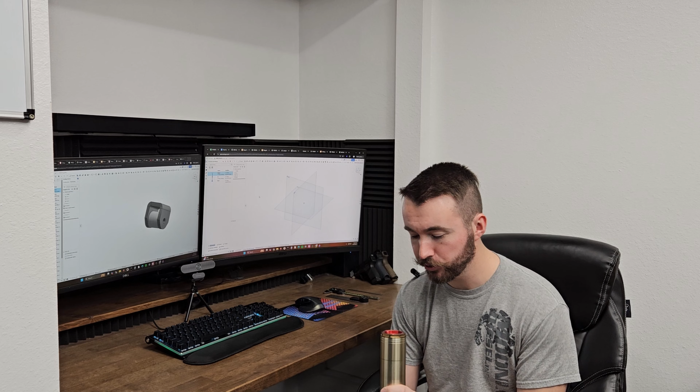On the agenda for today, we have the fork seal driver, and I'm really confident in that one. It doesn't take a lot of force to drive in those fork seals. We'll be building one that can do the dust seal right here and also the fork seal up inside of there. It's going to be a two-piece wraparound design, and then I'm going to come up with a fancy way to hook them together so that they don't fall off.

If you've seen the Motion Pro Ringer, they have like two separate rings that interlock, and as you can see here, I already redesigned that one and printed my own. That's how it works. You have these rings that wrap around the outside, and then once you stick these together, you just rotate that and it can't come off. So I designed this just for fun to see how it would work. This is kind of my test before making a YouTube video about how to do it so that I for sure know what I'm doing.

But I decided that the ringer type design isn't good enough for me because it was someone else's idea. And it is very cool, it works super well. But yeah, they have it patented. So I'm gonna let that thing be theirs. It's cool if you wanna make one for yourself, but I'm gonna leave it at that.

So I design injection molded parts all day for a living, so what I'm going to do is an oversized snap feature type stuff like you might see on an injection molded part. Basically, it'll have a catch on the one side and snap together on the other side. That should work really well, and since it's all 3D printed, that lets us do a little bit more complicated of a part there because it doesn't have to be machined.

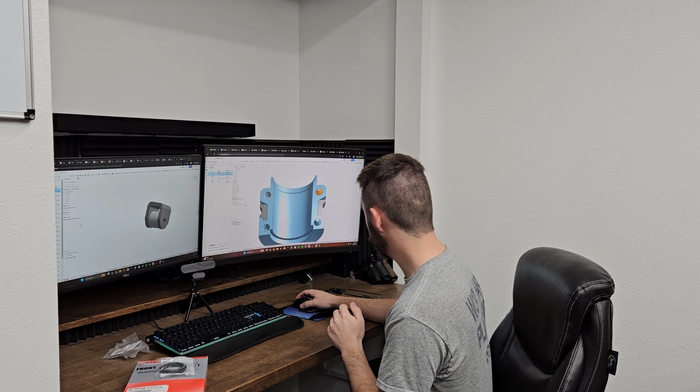And normally I would just go back and edit the part studio that I already created for that, which is right here. It's one common part across both sides. That's why these little posts here are offset. They're protruding on this side and cut out on the other side. That is just so that it's a common part. And then same with these, they're common parts too. I don't really think it makes sense to do that the same way on this snap feature design, because I could just do one big solid one that clips onto the other one. But at the same time, I'll have half of the parts. So give and take, I still have the same amount of unique parts to print, but I just have to print one of each of them instead of two.

So for the sake of how I want to outline this video and actually show you how to do this, I'm going to start a new part studio right here, and I'll bring up the screen so that you can follow along, and I'll try to explain what I'm doing, at least for the first part of this, and then when it gets into the snap feature, I think I'll kind of just blow through it and maybe try to voice over explain a little bit, because there's a whole lot of information once you get into that more detailed stuff. But to get the initial shape, I think you'll be surprised how easy it really is. So let's jump into it.

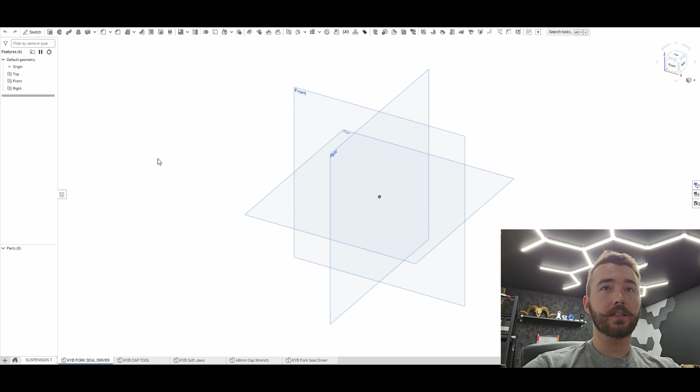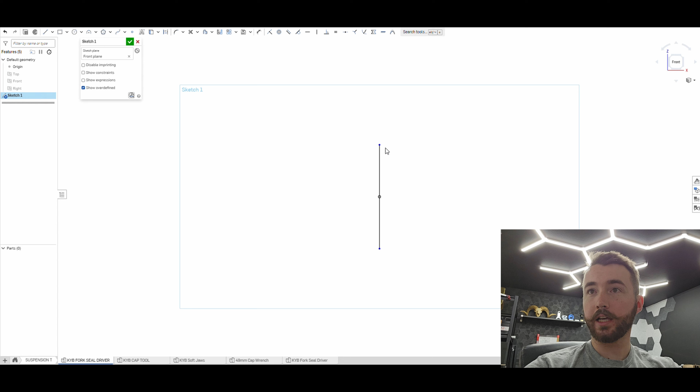Okay, let's get started here. I'm gonna start by making a sketch on the front plane. I just hit N to go flat to that plane and P to remove the planes. L is for a line, and I'll start above the origin and go down right underneath it. And then I'll hit Shift M, which gives me the midpoint constraint, and I will make it so then these are mirrored across that origin. Now I'll set that to, like, 2.5, I think.

And that is my revolve point there. So now I'll make my first line for the part. I'll use a horizontal command from here to there and here to there. That's just the H key.

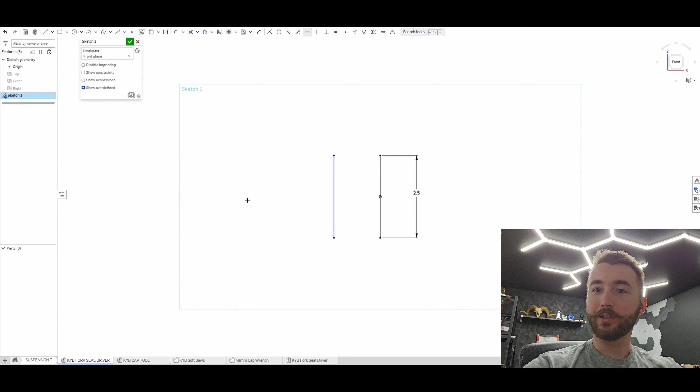I use keyboard shortcuts for everything at this point. I don't think I could make myself do it without it. I mean, I do this 40 hours a week using keyboard shortcuts for everything. So I'm sorry, but I don't think I could do it without using keyboard shortcuts.

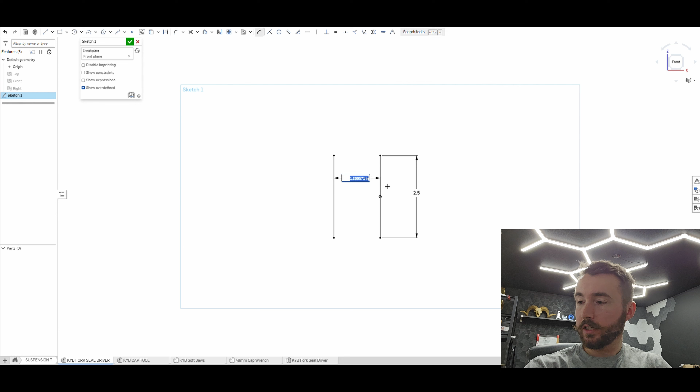Oh, that was D for dimension. So this is a 48 millimeter tube, measures 47.91 millimeters. I think I'll still do 48.5. Oh, I forgot to do millimeters. 48.5 millimeters. So, yeah, you have to type in millimeters when you're set to inches, and it's not worth switching all my stuff over to millimeters just for this, especially because I'll be using inches for everything else.

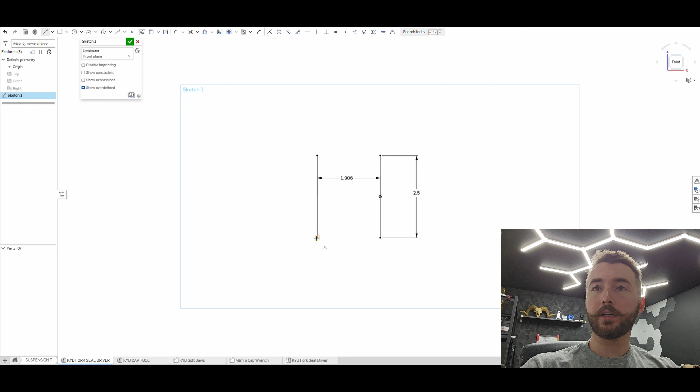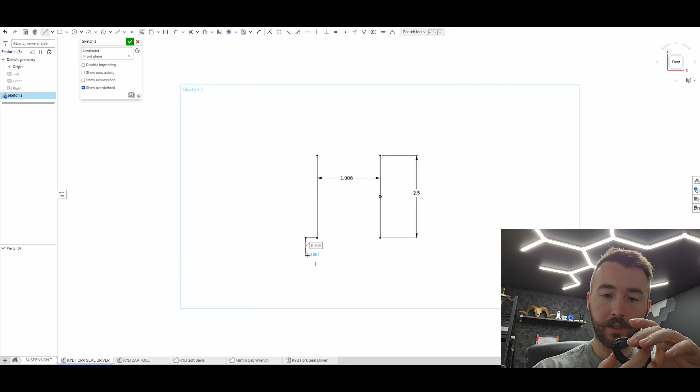So other things that I want here, I need to have a bump out on the bottom, and this is going to give me a little perch. If I open up the dust seal here, let me make my little screen down on the bottom here bigger. You can see the dust seal has this edge that sticks out, and we want to miss that and push on this edge to drive that in. So I need to have this slot clear that.

I'm not going to put a dimension in for right now. I'm just going to say roughly where I want it to be. And then I'm going to go up here and maybe do like a nice little chamfer kind of deal. Just make sure that we're not grabbing any constraints there. And then I'll go right up into place there. Now, where do I want to drive on this?

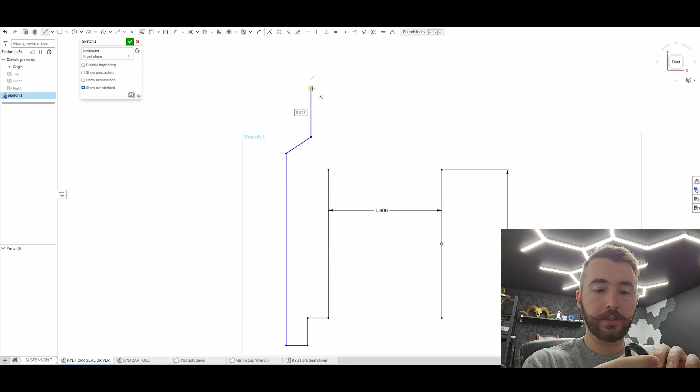So now when I work on the actual fork seal driver, I want it to push on the outer edge. That is going to be the safest spot to push. So what I'm going to do is just have that, you can see it cuts in. And then I'm going to, I don't know why I'm so high up actually. This should be way down here. I don't know what I'm thinking. Drag this down, do another horizontal command on that. Ugh, getting ugly.

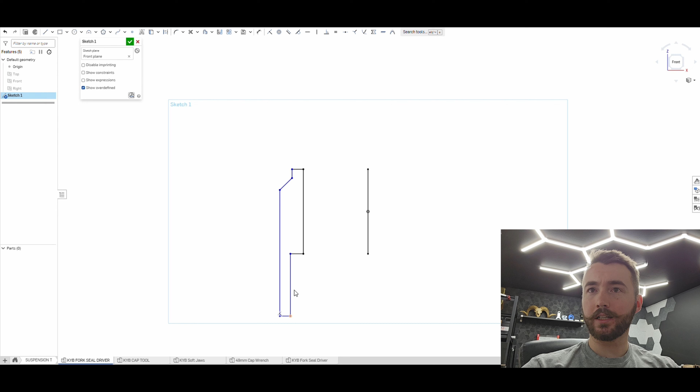So when you move stuff around this much, that's when it's actually nice to dimension things as you go. But it's all right. Look at that. See, we can just get around it. We're fine. So next thing to measure, I'm going to take our dust seal and I'm going to measure the total OD, outside diameter, if you're a layman. Looks like we would have a good amount of clearance with 2.1 inches. Maybe we'll go 2.12. That gives us plenty of room.

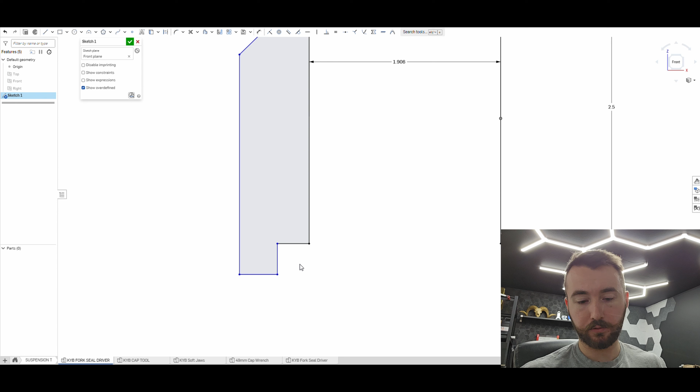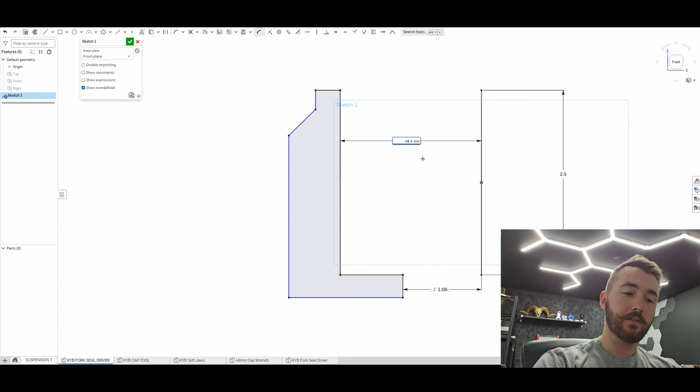So now we'll take this, and the easiest way to do this is just go 2.12 times 0.5, and that gives you, who knows why, I don't. I forgot to do that on this one. So that should be 48.5 millimeters times 0.5. So let's get that adjusted a little better.

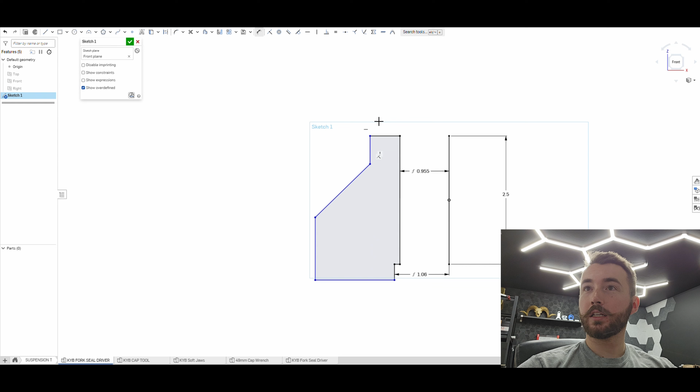Now we will see what is our outside diameter of the fork seal. Looks like we are 2.29. So this one, we don't want more clearance than we have to have, because that's just less driving surface. So yeah, we're like 2.299, I think, is a good spot. So for good clearance, I would say like 2.85 would be as much as I would go that way. So 2.85 times 0.5 gives us that right there.

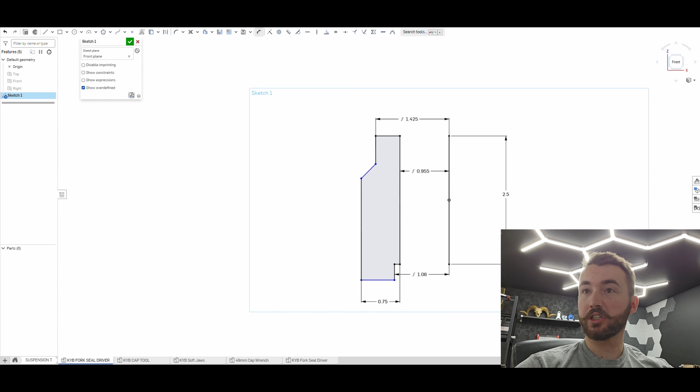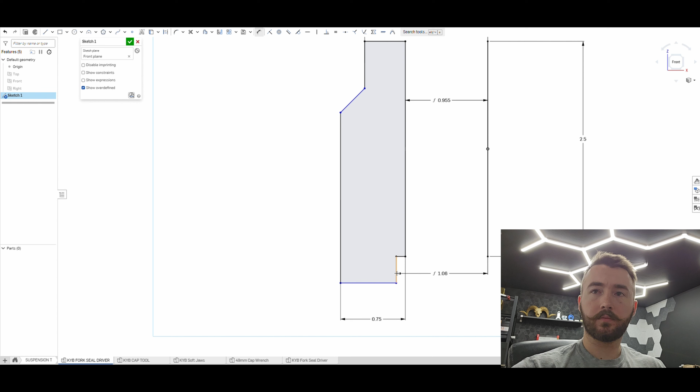And then as far as our total outside, that's one that we can make up ourselves. So I'll just go off of the thickness here. I think 0.75 thick is fine. We're not injection molding it. Wall thickness doesn't matter. So you can see the blue is what we haven't defined yet. So the depth of this is the next thing that we're going to define right now. Let's put it at 0.17.

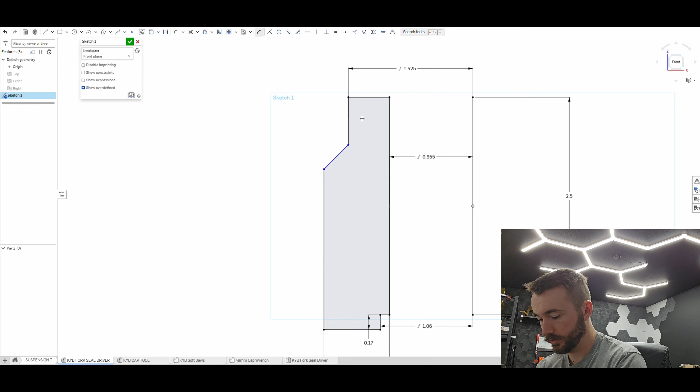And then how much room do we need to actually drive that in? That is a good question right there. I think what we'll have to do for that is pull the dust seal out. I'll get a screwdriver and pop that out real quick. Got that out now. Just worked around it. Now I can slide that up. There's that little guy too.

And that fork seal, it's not very far in there. So there we go. You can see there's a little clip that's in there too, a little metal clip. That's what's sticking out. And then right on the other side of that is our fork seal. So I'm going to take the depth measuring end of my calipers, stick it down in there. That is sitting on the fork seal. And it looks like we only need 0.26, like just over a quarter of an inch.

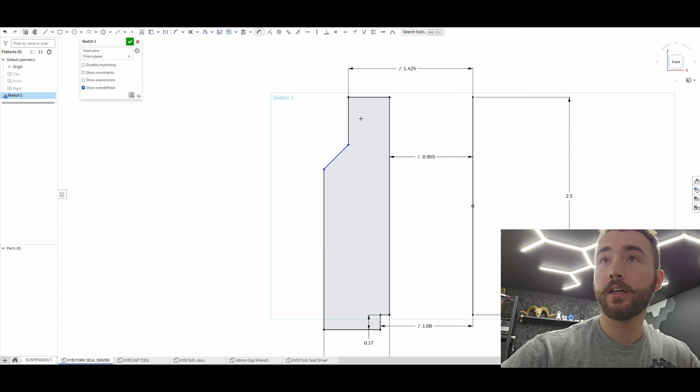Or 260 thou if you're a machinist. So just for good measure, I think at least 3/8. And then let's just set this at 45 degrees, or 135 working from the other direction. I think that needs more. Let's go 150. That looks a little cleaner.

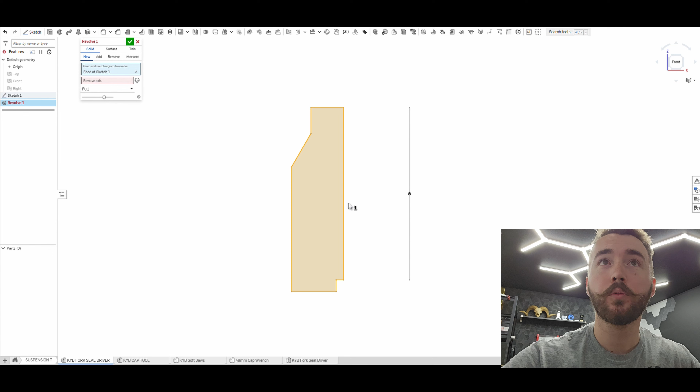So now is that magical part I was talking about, where we can just take this. This is the revolve command. I selected the face I want to revolve, the axis that I want to revolve around, and then I say one direction, 180 degrees, and we have the shape that we want.

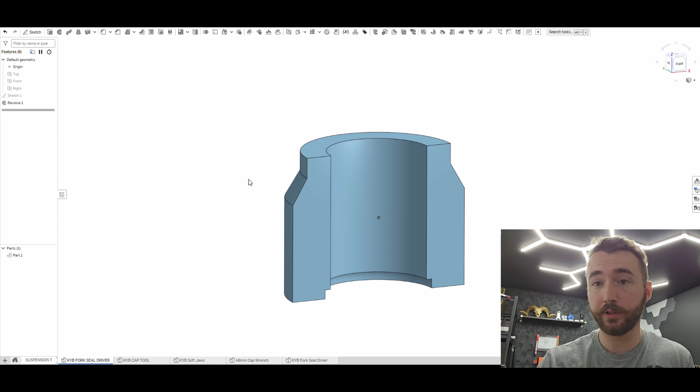So if you were just creating your own fork seal driver and you aren't quite as committed to 3D modeling as I am, you could be done here. This is half of your part. You just print that twice, stick the two together, and drive that in. Anything on top of that you do is just gonna make it better.

The next most important thing I would say is to add some sort of aligning feature. So like pins on this side that key into the opposite side and don't let it go up and down from each other. And then next most important from that would be an actual locking feature, which isn't that important.

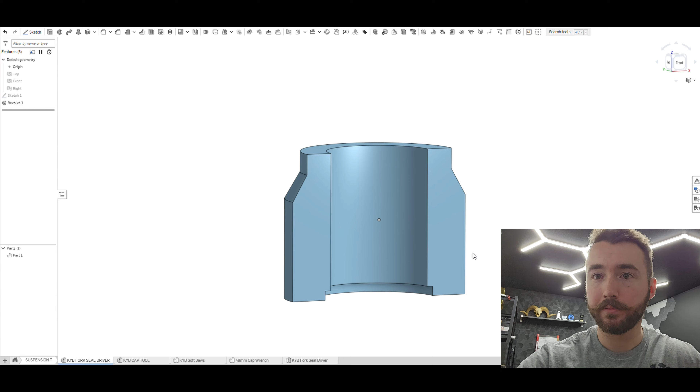Like if you go on the Rocky Mountain website and order a Tusk one, they don't have that. Like the actual $35, $40 one that you buy, that's like the cheaper option. If you want to buy the $80 Motion Pro RingLock one, then it has a locking function. But the typical one that you buy doesn't have a locking function anyways. So it's not a big deal if you can't 3D model one. But the RingLock design was actually super easy to model.

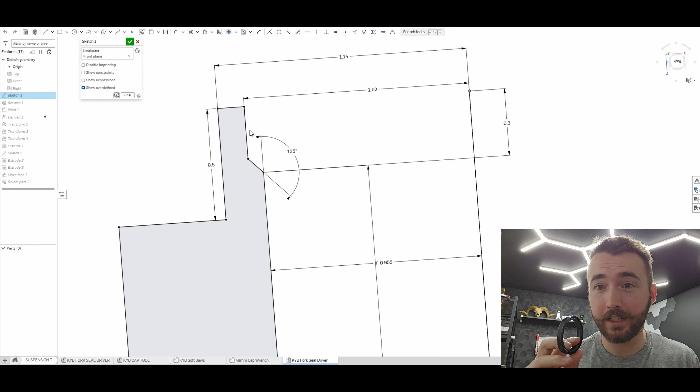If I just walk through my design tree real quick here, you can see what that sketch looked like. I just had this same thing here. I added this deal to cut out so that I'm only pushing on the outside of the fork seal, but that was before I actually had the fork seal in hand, and that is the first surface to stick out, so there's no reason to do that, I don't think.

So I just revolved that. I'll just walk through it. Revolve that, and I'm left with this immediately, which is 90% of the way there. I threw that radius on. Most important part right here, added the logo on the back. You know, don't forget that.

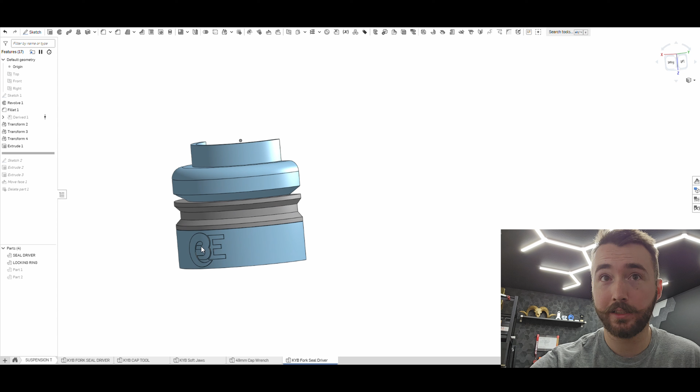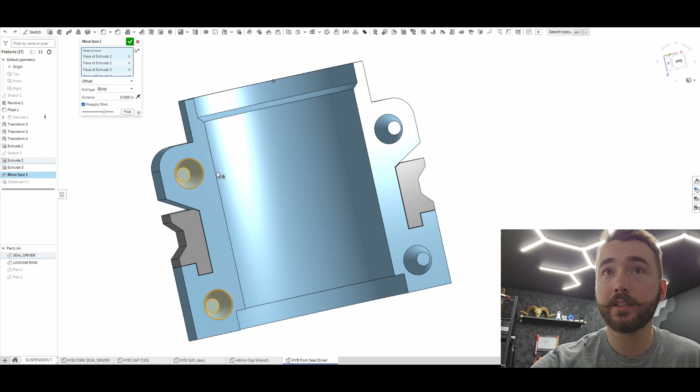Next sketch here was for my post holes, the aligning features, whatever you want to call them. Extruded those. This side out, that side in, so we have a common part. And then I did a move face so that I have clearance. I gave it, I think, 5 thou. Yeah, 0.005. That just makes it so that those parts can easily connect to each other.

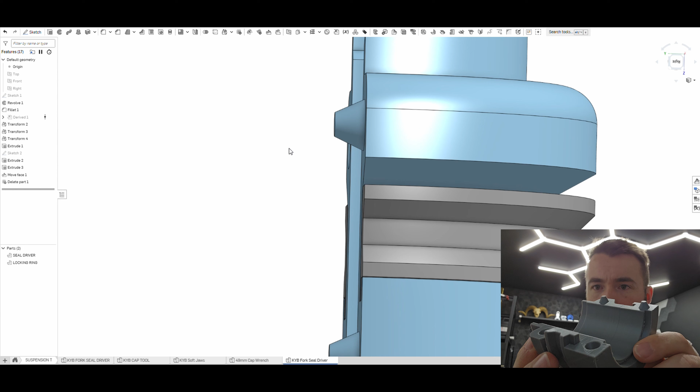The reason there's so much draft or angle on them is just for printing, because this can be hanging out and the printer will just print that no problem. If I show this one, those printed gorgeously. That was on the Prusa. It's a MK3, not one of the new ones or anything. I got it like 5 or 6 years ago.

I'm going to be doing a trip with the boys here in a couple weeks down to Green River, Utah. I don't know if you've ever been there, but it's really cool. It's pretty much down by Moab. Same kind of riding. Super fun stuff. It's about the best riding you can do anywhere. So very excited for that.

Just want to get this bike tip top. We're doing fork seals, oil service, new tire on the back, new headlight. Obviously, I'm putting in this headlight. This is a Rigid one that I had laying around. That should work great.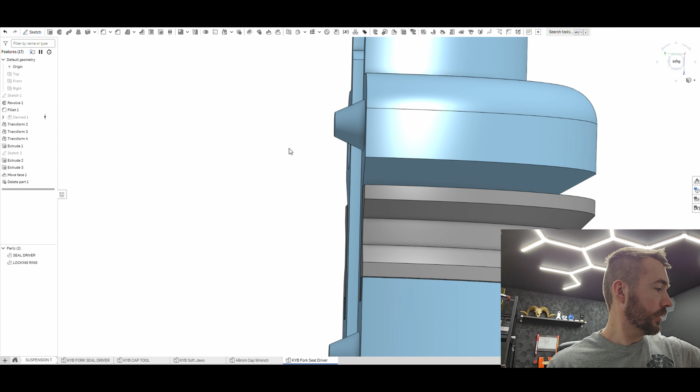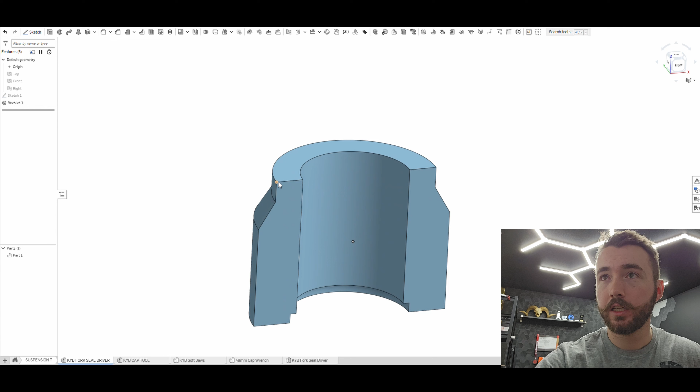But yeah, I'm going to go ahead and model the rest of it here and just do like a time lapse of that, because that stuff's a lot harder to explain. I'm sorry, I'm no good teacher. But real quick to go over our dimensions. So our outside dimension here is 2.85. So let's measure that.

Is that right? Did I say that right? It shouldn't be 2.85. I read it wrong. That should be 2.185. See, this is why we check stuff.

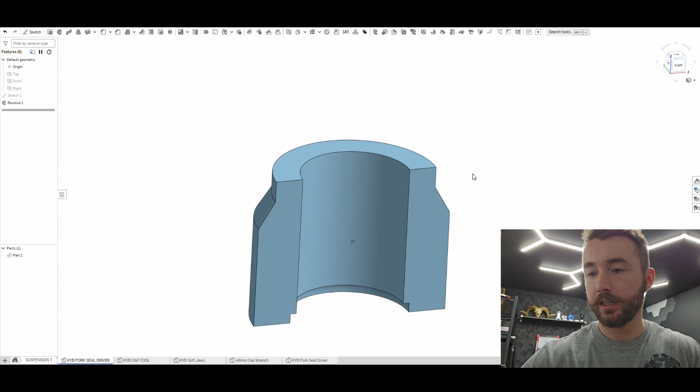Man, I've been making a lot of mistakes here. It's almost like everything's harder when you're trying to video yourself doing it. Anyways, look, yeah, you even missed a button.

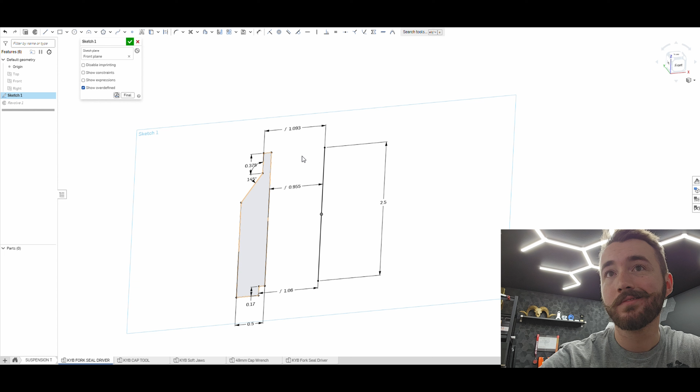Okay. Wow, that changed the look of everything. So let's change some of these arbitrary dimensions to something we like a little better. I don't think that needs to be 150 anymore. We can do 145. Yeah, that's fine. Okay, so that's what this guy looks like now. It might be a little bit stubby. Maybe we'll give it a little bit extra length.

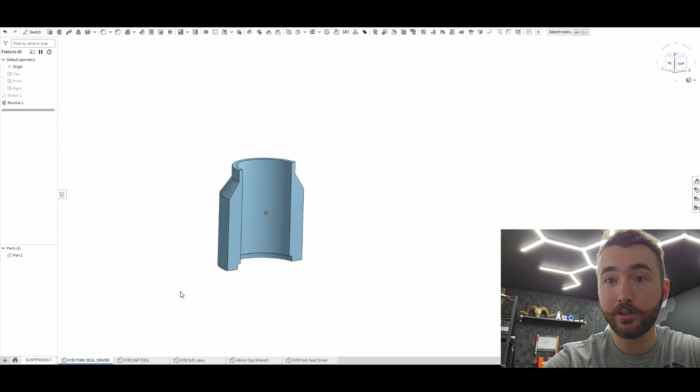And that's all easy to change. Like we could just go in here, and the way I have it set up, if I just say 3, then it is proportionally bigger. It's important to always set up your models that way, because if you're interested in doing product design or anything like that, you are working for a client, which means that they change their mind constantly, and you have to go change the model constantly to make it the same.

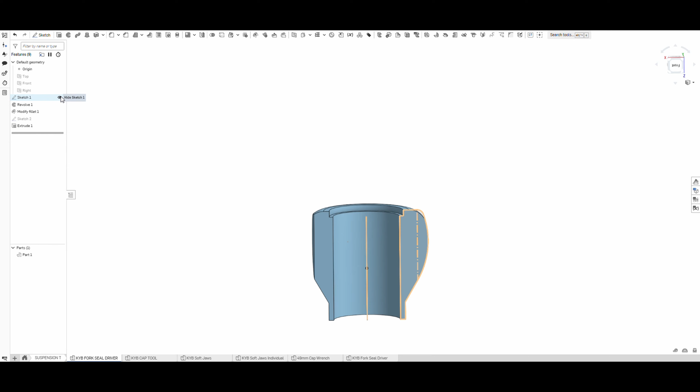Okay, it's actually a couple days later now. A key thing that I did was I took that ringer type design that I made, and I actually used it to install fork seals on my own fork and my buddy's forks, and learned a couple key details about it that were pretty crappy. Number one was those sharp edges that I left on there to print nice and flat against the print bed. Cut the crap out of my hands. That sucked. You're not really pushing on it a whole lot of times, but enough that if you leave a sharp corner, it's going to hurt you. So first thing I did was make this rounded shape to fix that.

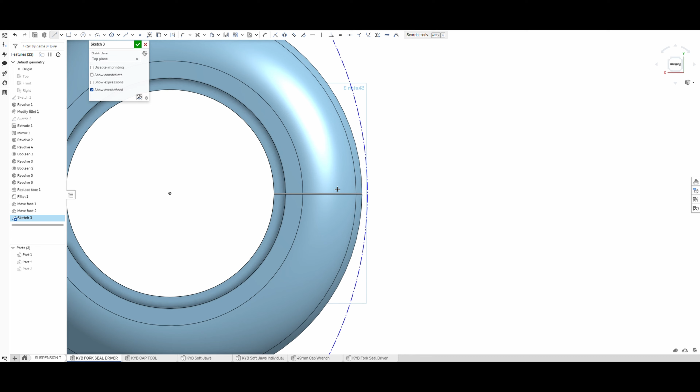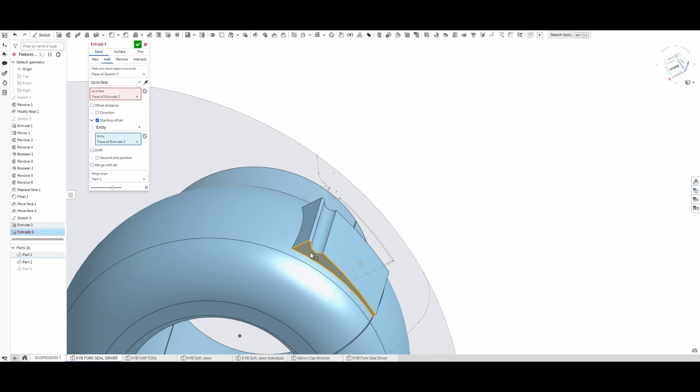And then also the distance of the part that protrudes to pound in the fork seal needed to be longer than I thought, because you have to use that to drive in the bushing that's in there too. I didn't realize that, so updated that to be a little bit longer, and then came in here. And then other than that, I am just adding in my snap feature design, the stuff that I already talked about doing. You can see the hinge is what I started with, and now I'm designing this snap feature that is designed to work around the rotation of that hinge. Pretty slick that way. Just got to make sure it's nice and clearanced and everything.

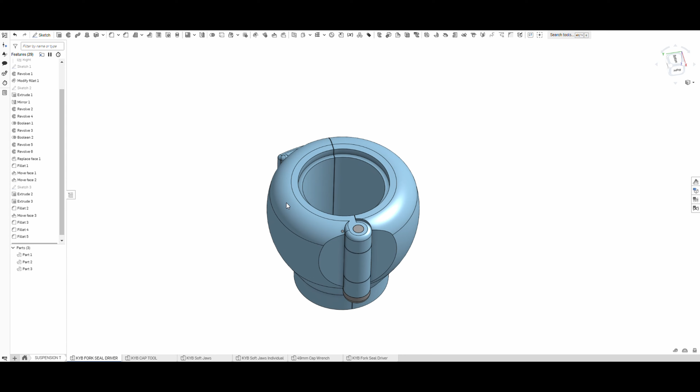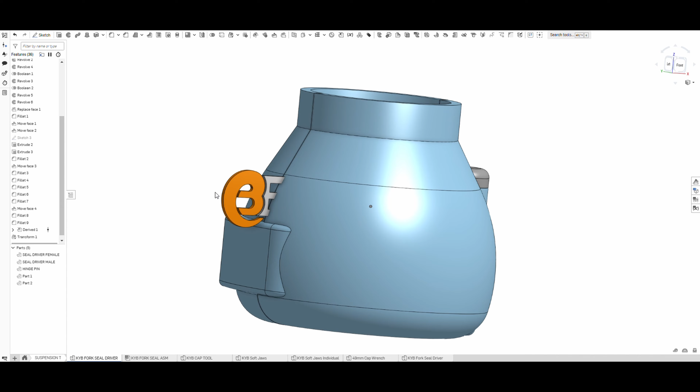So when I say that I design snap features for injection molded parts all the time, I don't do it like this, really. I'm not using injection molding thicknesses and deflection, stuff like that. I kind of just rolled with whatever on this, because it's not that important, I feel. So it's a lot bigger and thicker than you would see on most injection molded parts. Pretty much any snap feature I've designed for an injection molded part is a lot smaller than that. But that's all right. It makes it a nice big positive snap with a good handhold on it.

Obviously, like I said before, the most important part is the logo, so we got to throw that on here. I'm adding little grip sections next to it also. Going to throw that on that face, nice and pretty like such, and then rotate that around and do it on the other side too.

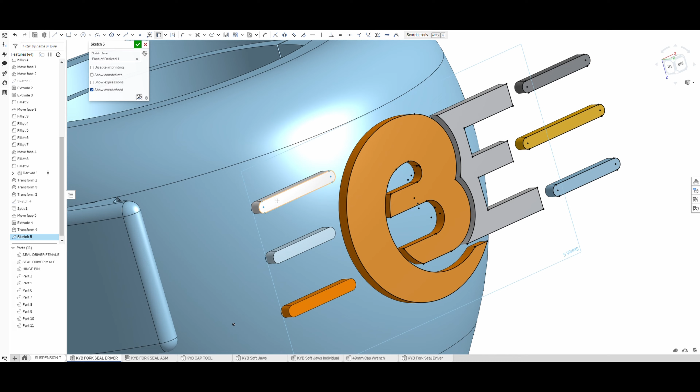For the hinge, I made a 3D printed pin. It's also designed to work with a 1/4-inch bolt, but I'd have to lower that thickness a little bit to make it actually work good on the part that it actually pounds into. So there's clearance on the first two, and then you kind of have to pound it into the last one. We'll see how good that actually works. Getting the slice ready here, and let's print this thing.

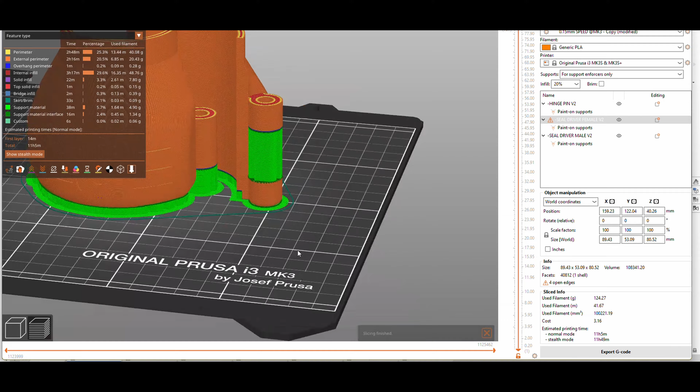So throwing it up in PrusaSlicer here, I added a lot more supports than I usually do. I have been having a little bit of issues with layer adhesion, and so I wanted to make sure that it worked really well. I put a new build plate on, and I think that helped a whole bunch too, because this turned out really nice. But because of all those supports, I had a whole lot of cleanup to do. I definitely would do less than this in an ideal situation.

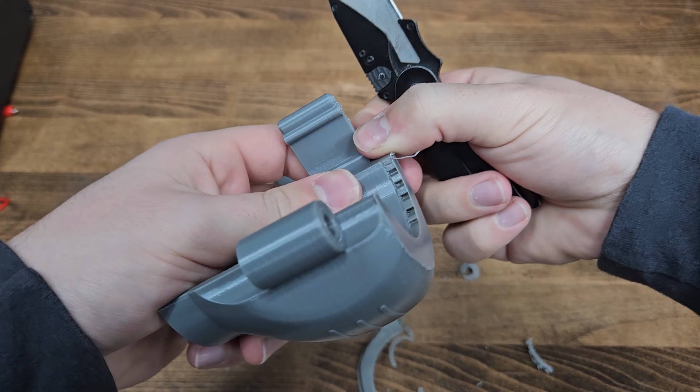Sorry for my voice, by the way. I'm very sick for filming this part of the video. I guess just for the voiceover part of this video.

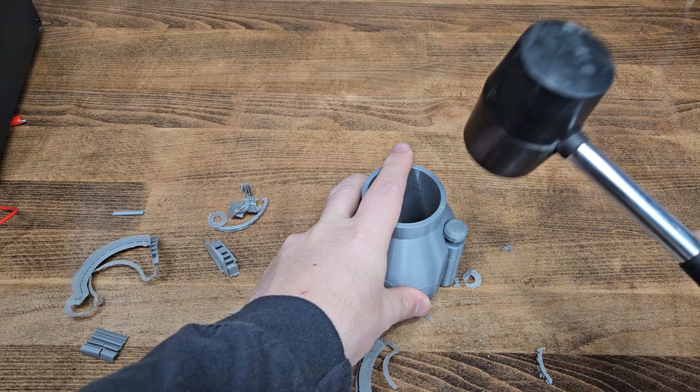But I got it cleaned up here, went to pound that pin in. That last little bit where I made it a little tighter, ended up breaking that little knob off. I knew I would. I should have just started with a punch of some sort to begin with. I'm using my dumb office tools because I'm not willing to go out to the garage to get my nice tools. But that pin still works even without the nice top on it.

And the hinge is really nice. It's nice and smooth, so it's not going to cut up my hands trying to slam that thing down into the groove. Turned out really nice, and I know you want to hear how that snap feature works. You're just waiting to hear how good that thing is. Yeah, it turned out perfect. It turned out so nice. You have to check out this next part here to see how it actually works when we do the fork seals.

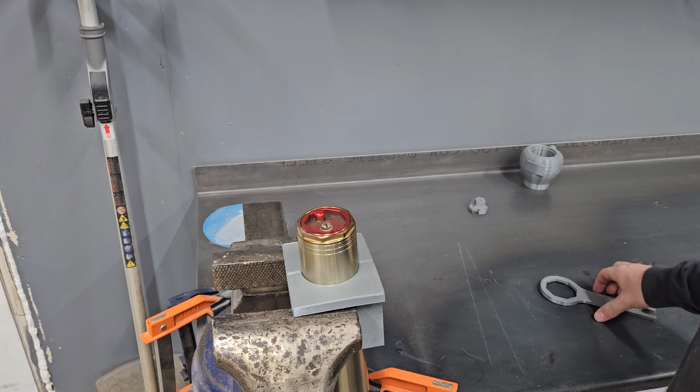So I mentioned I also was making all of the tools for me to do a fork service, and I did. I have kind of a janky pair of soft jaws there. I got an actual wrench that worked great, and on the back side of that wrench, you can see here in a minute, I use it as the cartridge holding tool. And I have a socket for the inner cartridge too, but I decided it wasn't worth doing on these forks. There you can see the wrench holding the cartridge.

That's great because all these parts are plastic, obviously, so they don't mar stuff. That's kind of the big thing that people worry about, is marring your shock components while doing this. So using steel ones or even aluminum ones, they're definitely a lot better than the steel ones, but not as good as plastic.

Like I was saying, I was going to do my inner chamber originally when I did this, but I did the first shock and the oil came out just like brand new, crystal clean. The bushings looked perfect. Open this one up, looks exactly the same. I'm not doing the inner chamber. The inner chamber is always cleaner than the outer chamber. There's only like 50 hours on this bike so far.

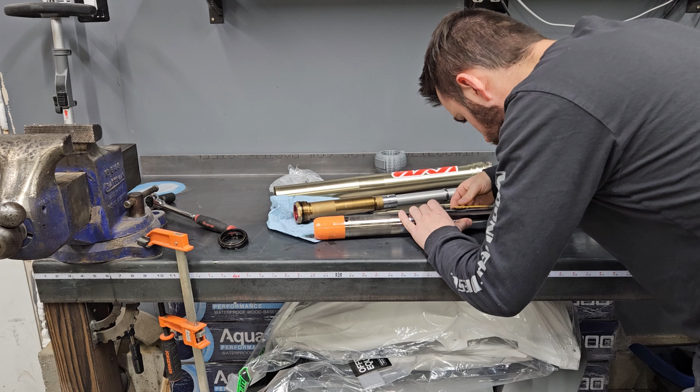The only reason I'm doing a fork service at this point is because the one fork got a nick in the tube. You'll see me polishing it up here in a minute, but that caused a little seepage in the seal, and so here I am sanding that out and then polishing it. Kind of a pain. It did get cut pretty deep, so it's going to probably leak a tiny bit every time the seal goes over it, but it's not going to be damaging the seal now that I knocked all the high spots off.

So yeah, all these parts actually worked super great. I'm really happy with how all this stuff turned out. The soft jaws, I absolutely can make a better version of this. I just made it as simple as possible. I think it'd be cool to do an angled version that also holds it at a 45 in the vise to try to get it more centered in the middle without hitting the middle of the vise part on the bottom. And then also something to hold it sideways across there, so while you're working on the inner tube, you can just kind of hold it there rather than holding it by hand.

That seal driver worked fantastic. I love that thing. It was way more comfy than the last one. It's kind of onion shaped, or maybe like a radish, or like a shallot. I think I'll call it the shallot. I like that. Pretty fun.